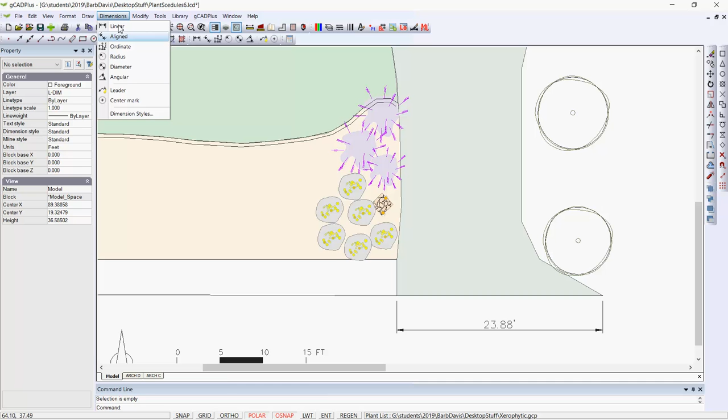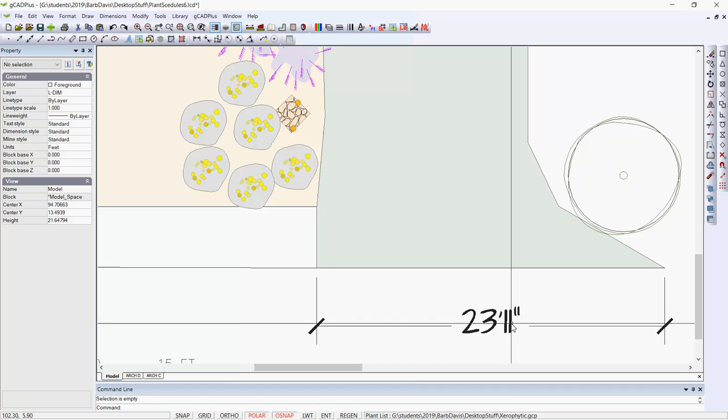23.879 feet. Now you might wish to display that, even though you're designing and working in decimal feet, you may need to display that for your construction team, and you can create different dimension styles, and let's list them now. There's one here called standard, which is what we're using at the moment, but there's another one called architectural and one called 1:96. Let's select the dimension, which is on a layer L-DIM, and we will change the dimension from standard to architectural, and you can, I hope, see that the dimension now is 23 feet 11 inches. So that's a setting in the dimension style that does that.

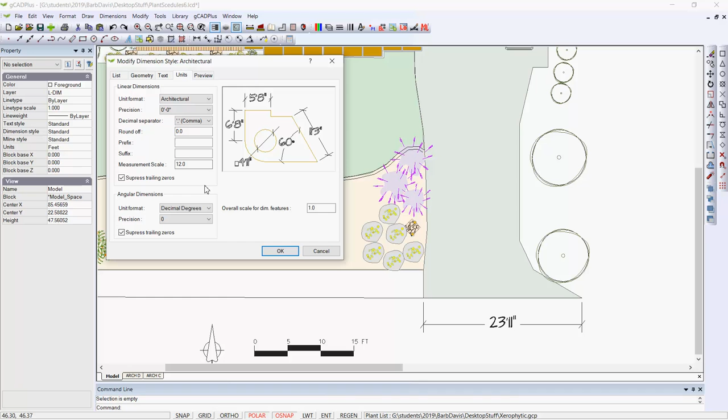If we go to dimension style and go to units and text here, firstly we have to say architectural, go to units. There's the measurement scale multiplication factor. There are 12 inches in a foot. So that gives us that type of dimension.

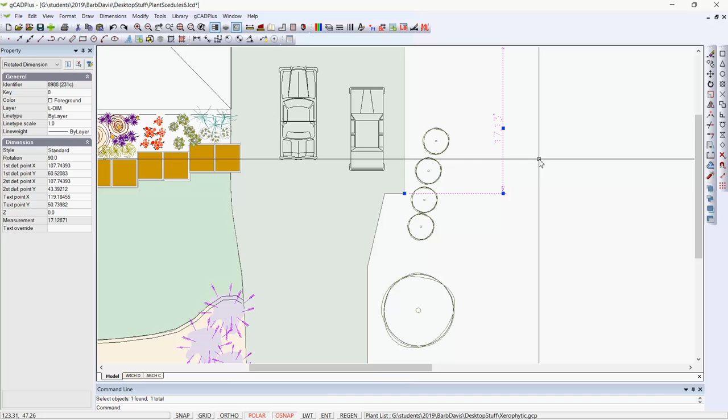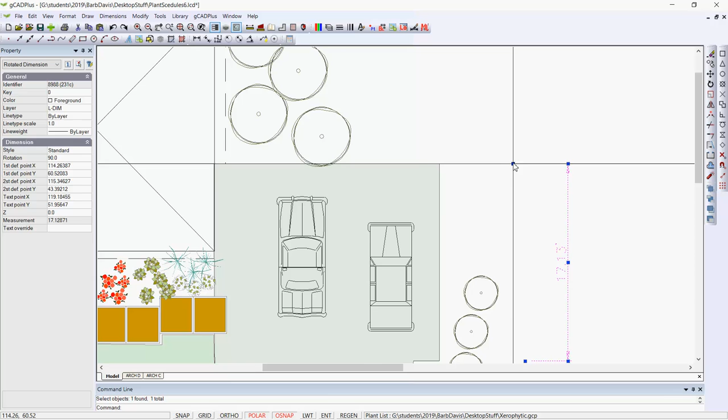You can do vertical dimensions, so let's do a linear dimension and run from one corner there to the other corner and move it out. What I wanted to demonstrate was that if you make a mistake, just as far as centralizing the text is concerned, you can just move it along and adjust. You can also adjust, maybe you don't like the offset from the dimension line, provided you've got polar on, you can move that line and we could have it out here. Now the dimension is not changing at all, but the position, we're effectively shortening that line. So there we are. That's being drawn in the current dimensioning style, which is controlled in our properties box.

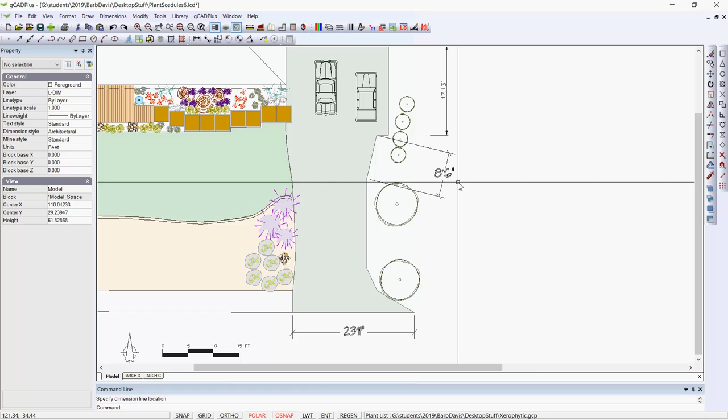So dimension style standard, we could change that to architectural, and the next time we draw a dimension, let's do one at an angle, and that's referred to as an aligned dimension. And again we use those snaps, pick up there, pick up the end of the line. You can see it comes out through here at 8 foot 6 inches. So we're using that different style because it's been set. So I hope you see that dimensions can work really well.

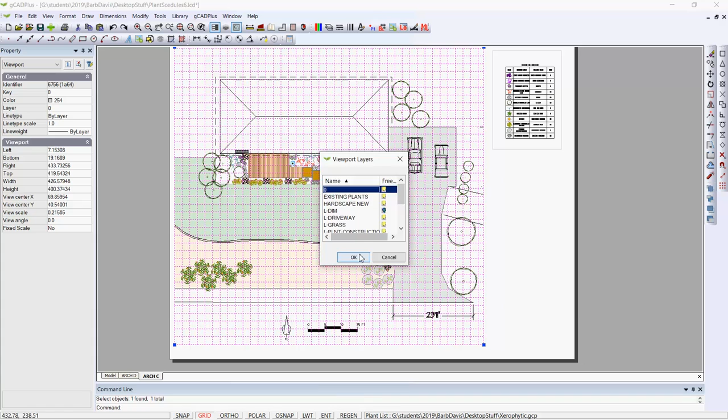If we go to the layout sheet, architectural sheet, you can also select the floating viewport, the edge, and you can click on viewport layers. Notice how our dimensions are currently showing. So we could turn off, let's make this layer the current one, and we've turned off the dimension layer. So you may have seen it disappearing from that. We turn it back on again by selecting the edge of the floating viewport layer and turn the dimension on again, and the dimension lines appear.

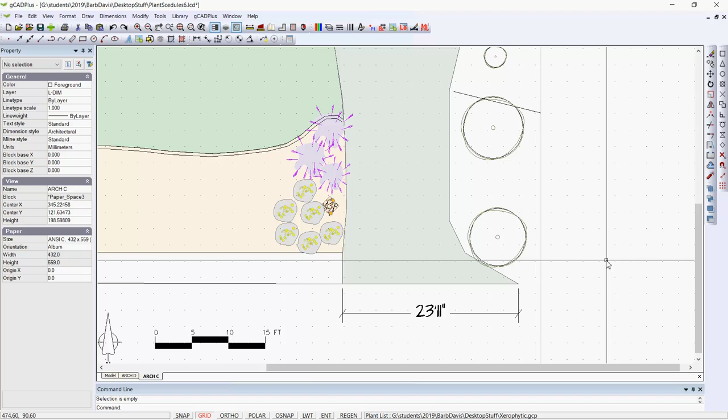So dimensioning is an interesting aspect to landscape drafting, but I can't stress enough, you pull the dimensions from the model, and it serves as a double check.